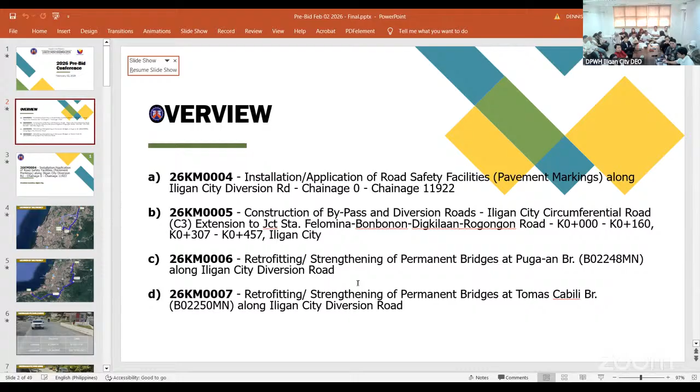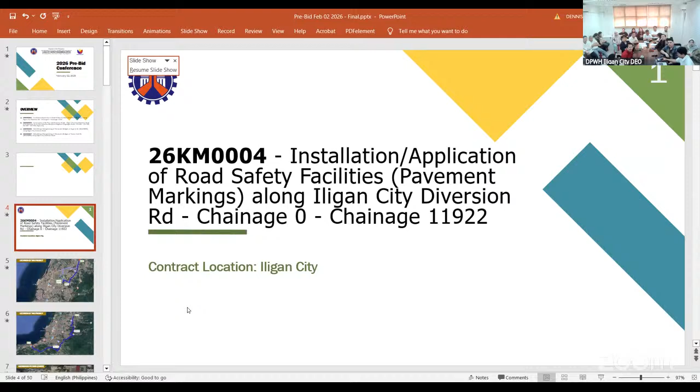So 26KM0004, installation, application of road safety facilities, pavement markings on the Iligan City Diversion Road, Chainage 0 to 11.922. Contract location: Iligan City. The project is 3.1 kilometers from the office. So this is the location of the project, start and end.

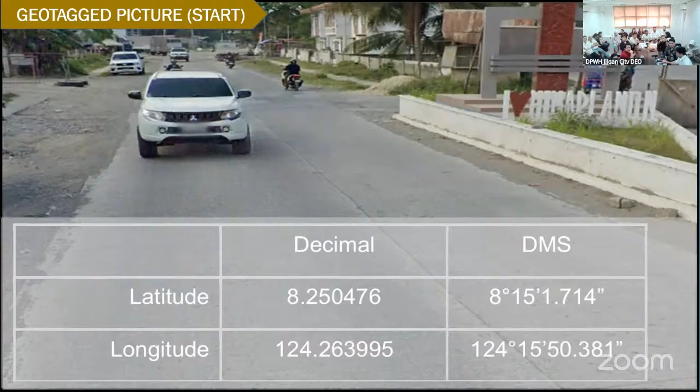Project description: installation, application of pavement markings and roadway lightings, with 92 calendar days, provision of field office for the engineer on rental basis. Scope of work: we have the facilities for the engineer, provision of field office for the engineer. Then 3 months, we have project billboard, a signboard. Then occupational safety and health program, traffic management, mobilization and demobilization.

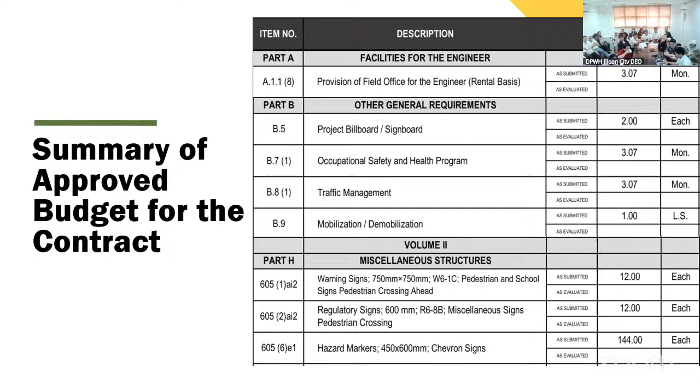Then miscellaneous structures, then we have warning signs, 750 by 750, pedestrian and school signs, pedestrian crossing ahead. Then regulatory signs, miscellaneous signs and pedestrian crossing, then hazard markers, chevron signs, reflectorized thermoplastic pavement markings white and yellow. Then we have single arm roadway lighting, 8-meter pole, 80 to 125 watts.

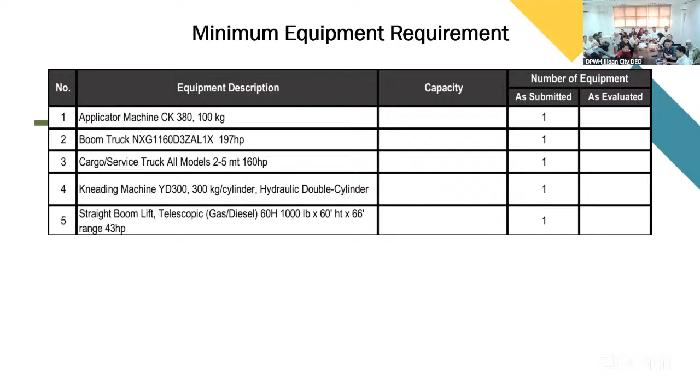Then the minimum equipment requirement: we have applicator machine, boom truck, cargo service truck, all models, 2 to 5 metric tons, 160 horsepower, then kneading machine, and straight boom lift telescopic. With approved budget for the contract of 18,614,480 pesos.

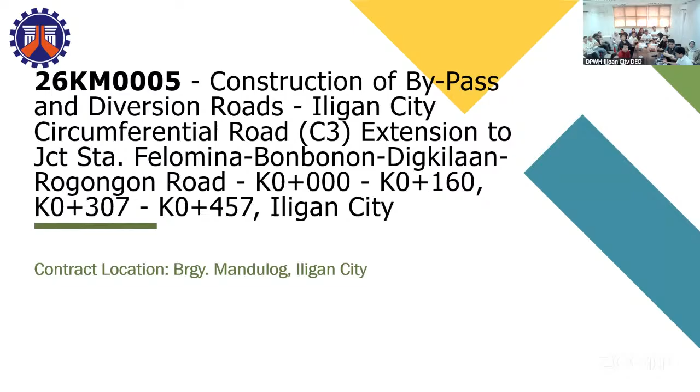Then for the next project, we have 26KM0005: construction of bypass and diversion road, Iligan City Circumferential Road, C3 extension to junctions Santa Felomina-Bonbonon-Digkilaan-Rogongon Road, 0 to 160, and K0+307 to K0+457, Iligan City. The project location is Barangay Mandulog, Iligan City. The project is 10.9 kilometers away from you.

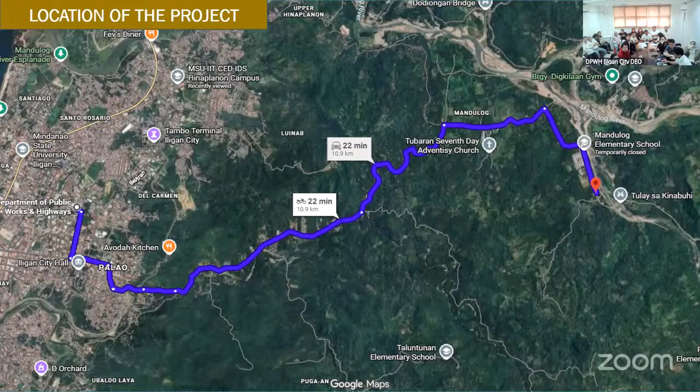This is the beginning of the project, approach A, and the end of the project.

Project description: construction of bridge approach with 280mm thick PCCP, 3.35 meter width, shoulder with 1.5 meter, line canal per shoulder, retaining wall, 200 calendar days project duration, and provision of field office for the engineer.

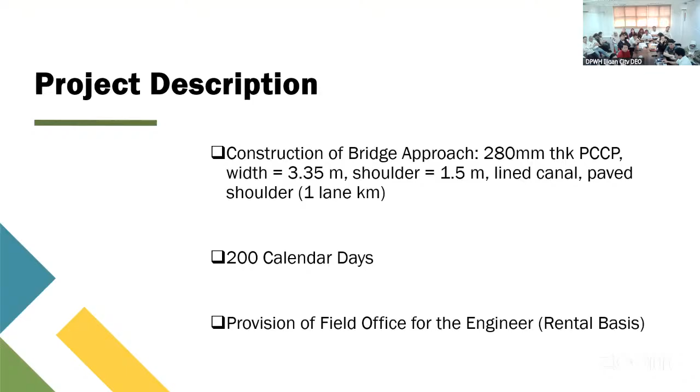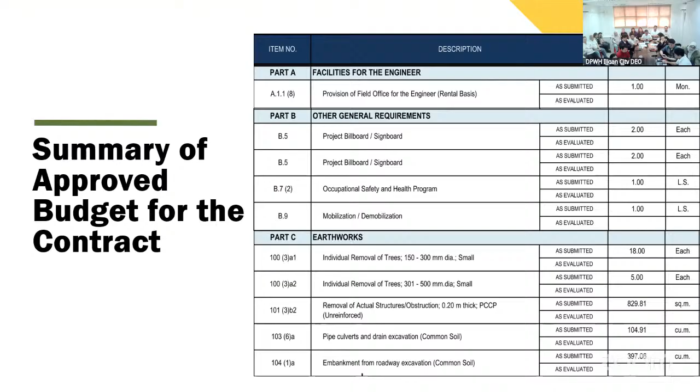Scope of works: facilities for the engineer, provision of field office for the engineer. Other general requirements: project billboard, occupational safety and health program, mobilization and demobilization, removal of trees, removal of obstruction, pipe culverts and drain excavation, embankment from roadway excavation, embankment from structure excavation, embankment from borrow, subgrade preparation, and aggregate subbase.

We have Portland cement concrete pavement and unreinforced, 0.15 m thick, 14 days, and 0.28 m thick, 14 days. For structural works, we have reinforced concrete, reinforcing steel, and structural concrete at 20.68 megapascal with 28 days, and 27.58 megapascal with 28 days. Also pre-molded expansion joint filler with sealant.

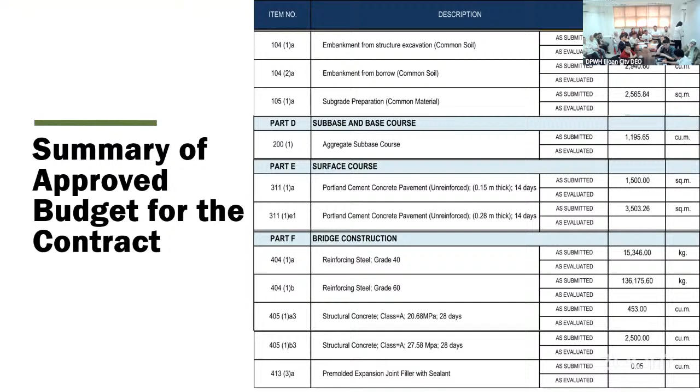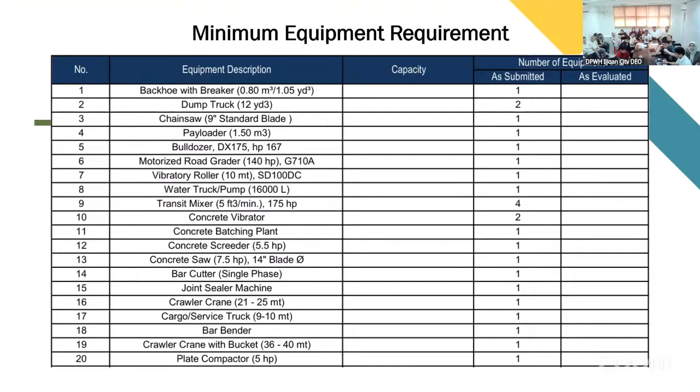For the minimum equipment requirement: backhoe with breaker, dump truck, chainsaw, payloader, bulldozer, motorized road grader, vibratory roller, water truck with pump, transit mixer, concrete vibrator, concrete batching plant, concrete screeder, concrete saw, bar cutter, joint sealer machine, crawler crane, boom truck, bar bender, crawler crane with bucket, plate compactor, welding machine, grout mixer, generator set, one bagger mixer, backhoe wheel mounted, applicator machine, kneading machine, vibro hammer, and material testing equipment based on DEO.

With the approved budget for the contract of 78,361,825 pesos and 26 centavos.

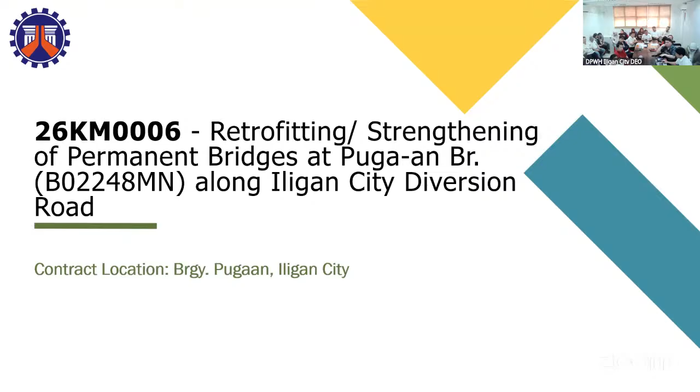Next project, we have 26KM0006, retrofitting and strengthening of permanent bridges at Pugaan Bridge along the Iligan City Diversion Road. Contract location: Barangay Pugaan, Iligan City. The project is 2.6 kilometers from the office.

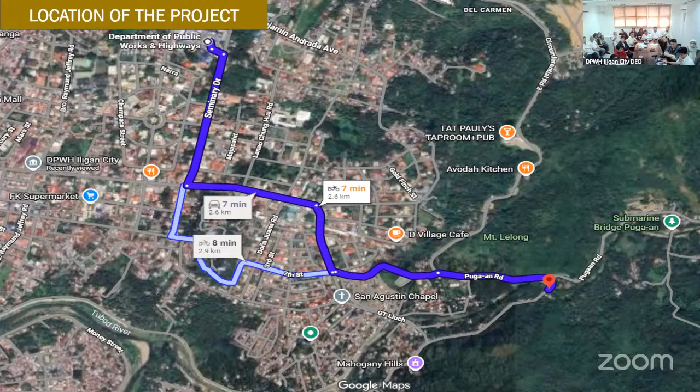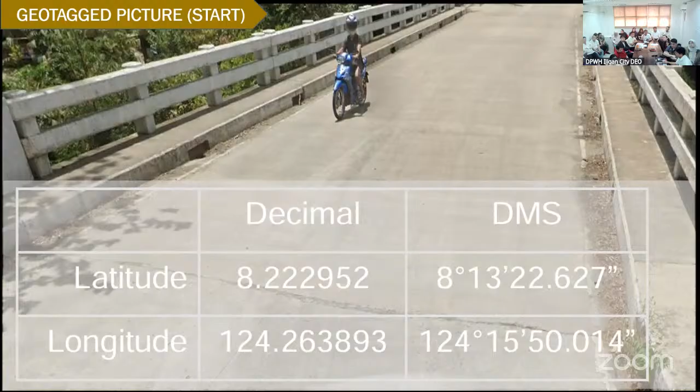Project description: retrofitting the deck of span with epoxy injection and repair of the slope protection, with 94 calendar days duration. Provision of field office for the engineer, rental basis.

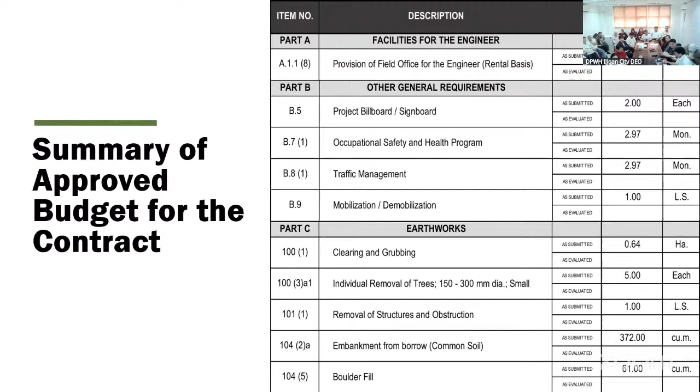Scope of works: facilities for the engineer, provision of field office for the engineer. General requirements: project billboard, occupational safety and health program, traffic management, mobilization and demobilization, earthworks, clearing and grubbing, removal of trees, removal of structures and obstruction, embankment from borrow, boulder fill, forms and falsework, epoxy injection and crack repair.

For drainage and slope protection structures: stone masonry, miscellaneous structures, seedlings and saplings for other programs and initiatives, and concrete joint sealant.

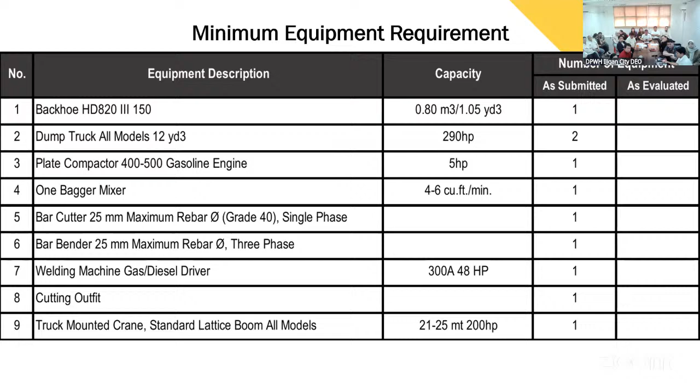Minimum equipment requirement: backhoe, dump truck, plate compactor, one bagger mixer, bar cutter, bar bender, welding machine, cutting outfit, truck mounted crane. Approved budget for the contract of 5,866,760 pesos.

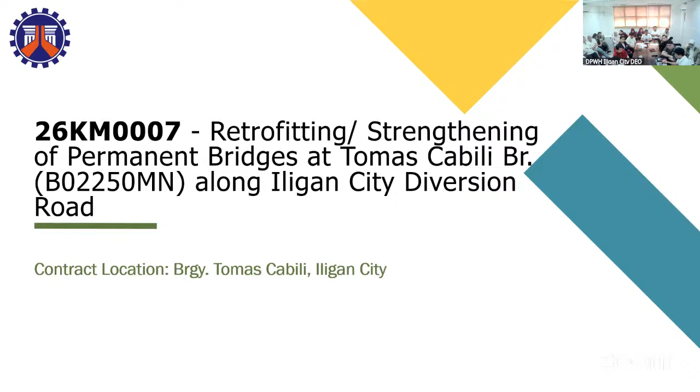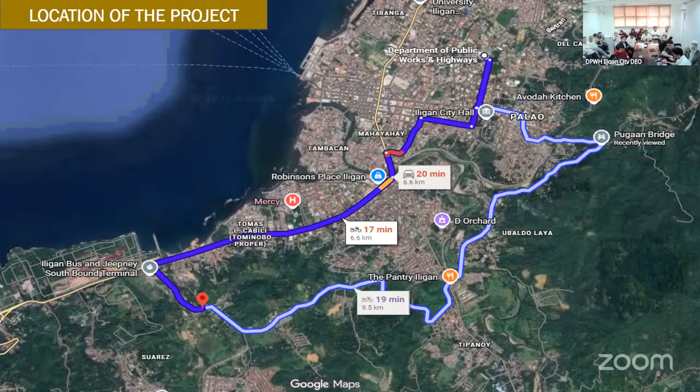Next project, we have 26KM0007, retrofitting and strengthening of permanent bridges, Tomas Cabili Bridge, Iligan City Diversion Road. Contract location: Barangay Tomas Cabili, Iligan City. Location of the project is 6.6 kilometers away from the office.

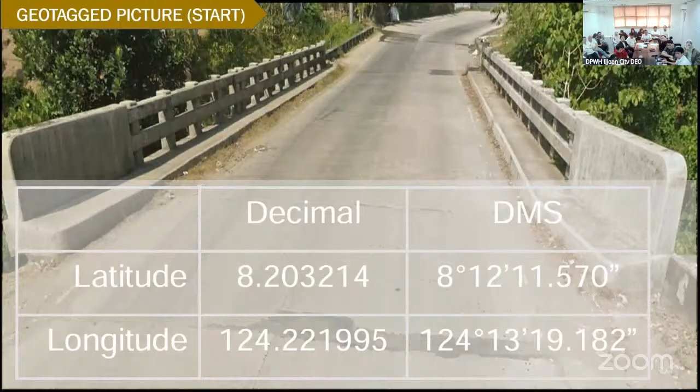Project description: retrofit the deck of span with epoxy injection and repair the slope protection, with 89 calendar days. Provision of field office for the engineer. Scope of works: facilities for the engineer, project billboard, occupational safety and health program, traffic management, mobilization and demobilization, clearing and grubbing, removal of trees, removal of structures and obstruction, embankment from borrow.

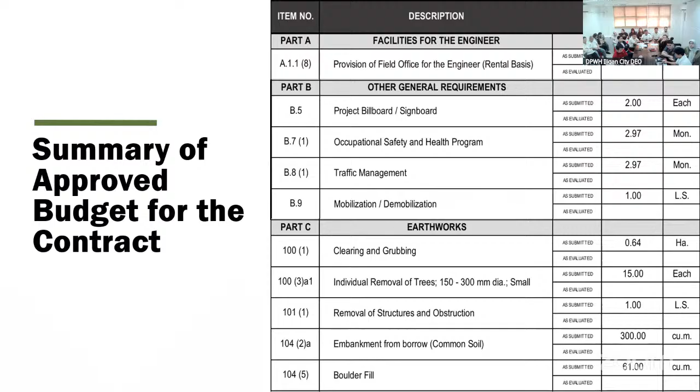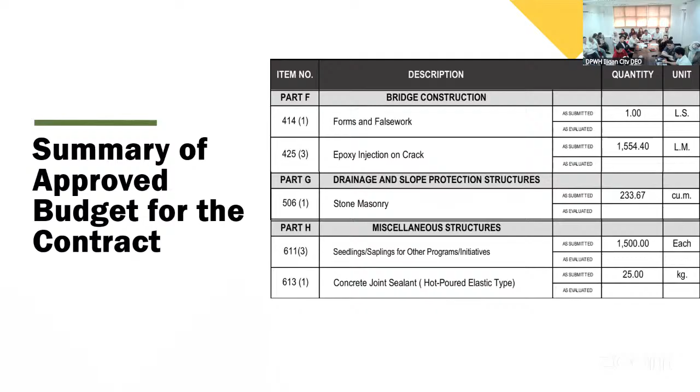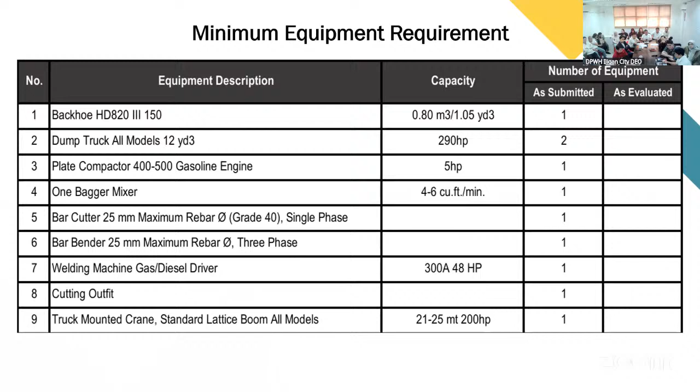Forms and falsework, epoxy injection and crack repair, stone masonry, seedlings and saplings, concrete joint sealant. Minimum equipment requirement: backhoe, dump truck, plate compactor, one bagger mixer, bar cutter, bar bender, welding machine, cutting outfit, and truck mounted crane.

With approved budget for the contract of 5,870,459 pesos and 80 centavos.

That's all, Mr. Chair. Thank you, Engineer Vallar. So, is the presentation for the projects completed? Is there any question from the members at the back, or from the observers or contractors? Is there any question or reaction?